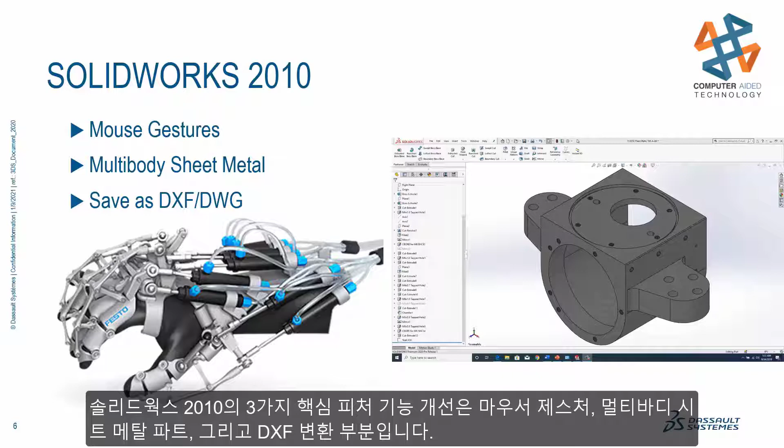Let's go all the way back to 2010. SOLIDWORKS World was in Anaheim, California that year. Kicking off the top SOLIDWORKS feature enhancements of the decade is mouse gestures, multiple bodies in sheet metal parts, and exporting to DXF files. We start off with the debut of mouse gestures. Using anywhere from 2 to 12 gestures, you can hold down your right mouse button and quickly select the feature you wish to use. Being a modal command, this can have different setups for parts, assemblies, drawings, and sketching mode.

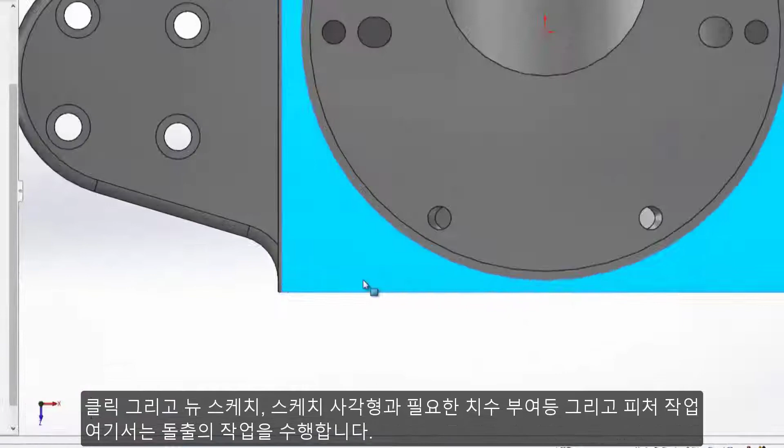Here, we're going to use mouse gestures to add a fillet, create a new sketch, sketch a rectangle, apply the necessary dimensions, and perform a feature. In this case, we'll do an extrude.

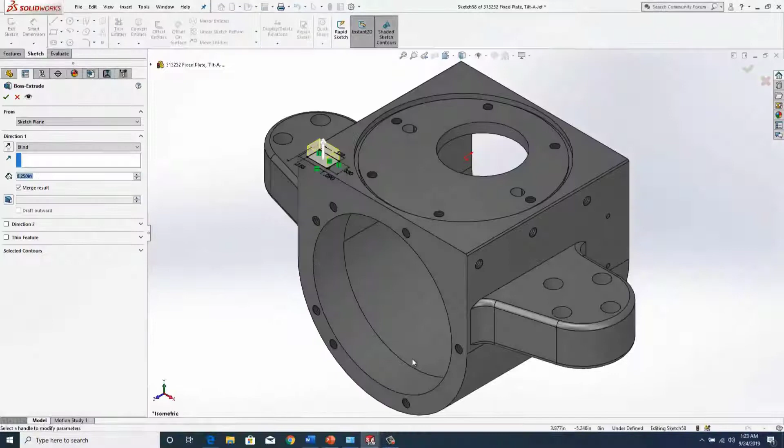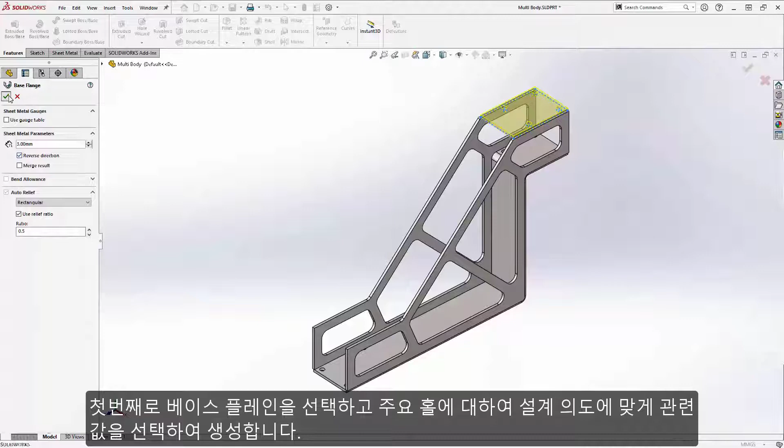Here we have a machined part that can be better manufactured out of sheet metal. SOLIDWORKS 2010 gave us the ability to do multiple solid bodies with sheet metal components, something that previously would have to be done with assemblies. Recreating this component out of sheet metal certainly requires these multiple pieces. Creating the top plate is easily done in this single part environment. First, base flanges to capture the design intent with these main holes. Now we are up to 5 individual sheet metal bodies.

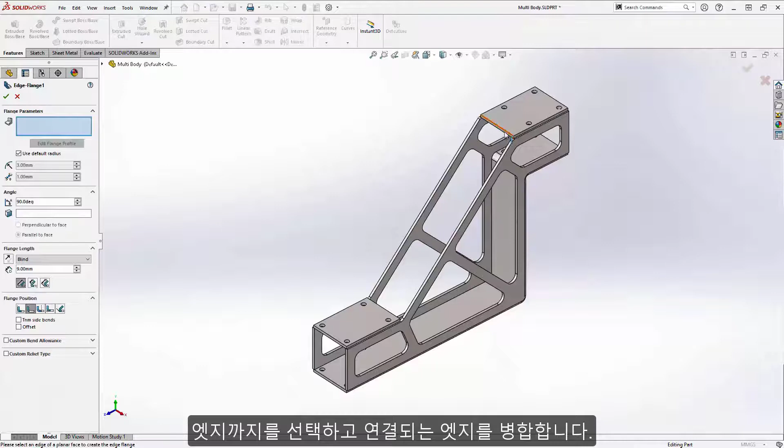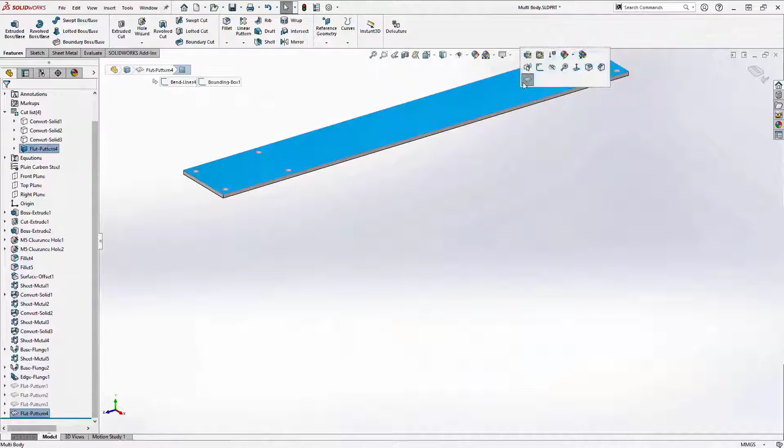Not only did SOLIDWORKS 2010 give us the ability to have multiple bodies, the edge flange command was enhanced, giving us an easy way to bridge these bodies together by selecting up to edge and merge. We can view the flat pattern of any of these multiple bodies easily. Utilizing this up to edge and merge command one more time, we can connect the two main side plates, making them a single body.

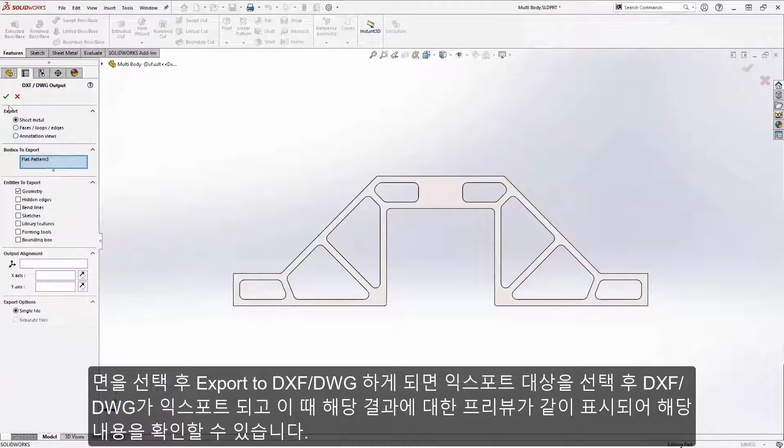After adjusting the bin location option and looking at the flat pattern, SOLIDWORKS 2010 also gives us another one of our favorites, this easy button for exporting a DXF. Just right-click on the face, export to DXF/DWG. It doesn't get any easier than that. We identify what type of geometry gets exported, and also have this awesome preview window that gives us the ability to remove any lines that we do not want translated to the DXF.

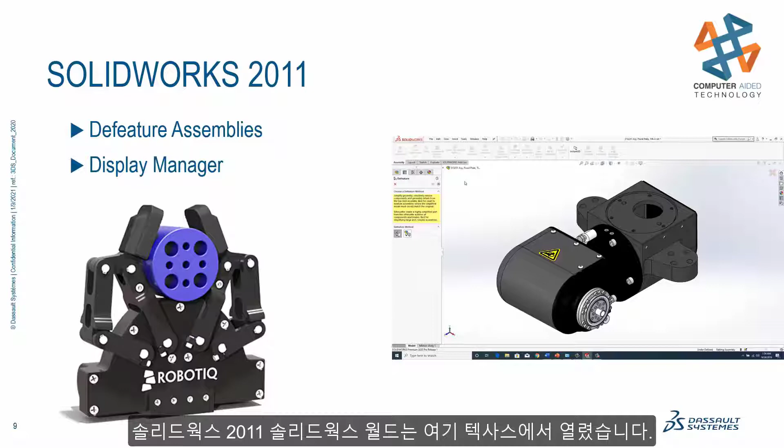Flipping the calendar forward to 2011, SOLIDWORKS World was in San Antonio, Texas that year. In SOLIDWORKS 2011, some of the gems include the Defeature tool for assemblies and the brand new Display Manager. Suppliers are always eager to have customers utilize their designs and products. However, customers typically don't need a lot of the internal detail of the design, in addition to which suppliers don't want to give away their intellectual property.

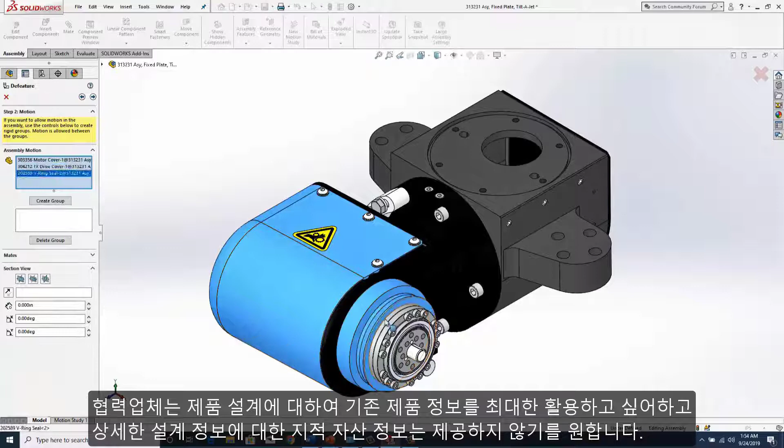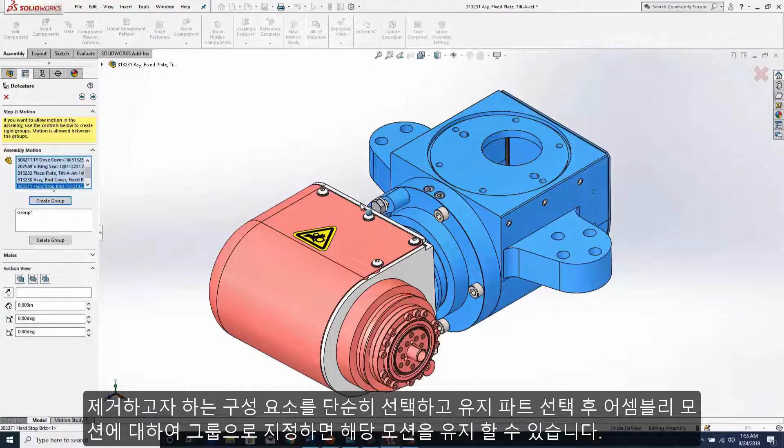We have a lot of options to pick and choose from of how to simplify the model. We can remove components based on their size, just take out all internal components, or specifically select components to remove or retain. One thing that's unique to SOLIDWORKS is the ability to preserve assembly motion. So we can come in and select several components and group them together. In this case, we're grouping the casing elements. We want the input shaft as a separate component, and then the output shaft as a separate component as well.

SOLIDWORKS will then go through and, based on our selections in this case, remove the internal components that are enclosed within the geometry, as well as ensure we preserve those features that we've selected. It only takes a few seconds and does a very efficient job of clearing out a lot of the detail that's not necessary. We still preserve a lot of the external detail because that gives visual information about what it looks like, as well as make sure it fits into your design environment.

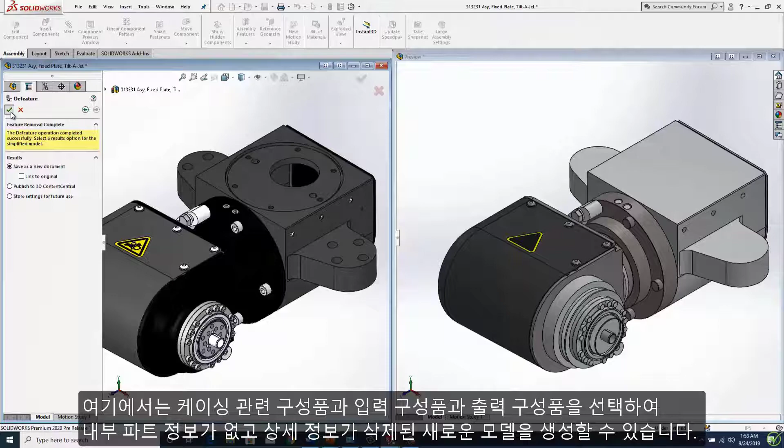SOLIDWORKS 2011 also introduced the Display Manager. Up above the FeatureManager, we now have a one-stop shop for all things visual. Here we can access scenes, adjust their settings like the lighting. We can see all the appearance properties of the components and easily change how they're organized. Listing by hierarchy, it becomes clear that some part appearances are being overridden by appearances at the assembly level. With this information, it's easy to remove that appearance definition, returning the part's original appearance. Without the Display Manager, identifying this situation is no easy task.

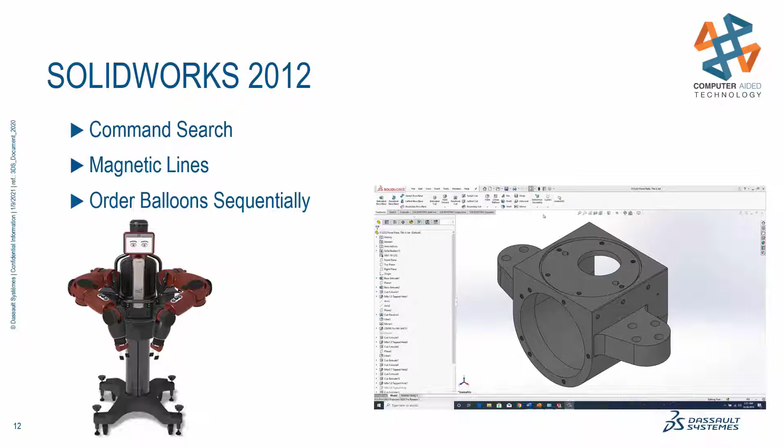Now we jump to 2012. SOLIDWORKS World moved to San Diego, California that year. The best feature enhancements of SOLIDWORKS 2012 include command search, magnetic lines, and auto balloon functionality. Command search is a powerful new tool that makes it very quick and easy to find any command that could be buried in a pull-down menu or in your CommandManager.

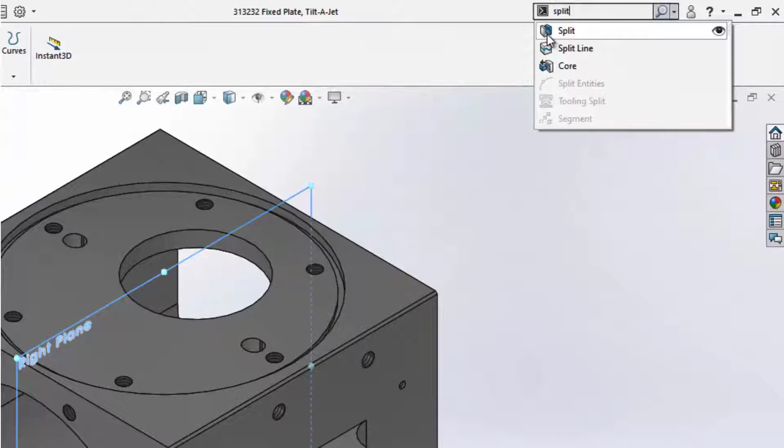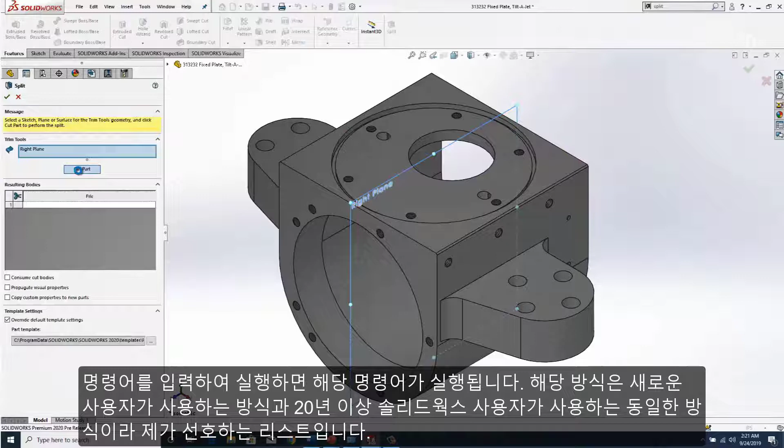Let's do a quick search for the split feature. We can easily add this CommandManager tab if it doesn't already exist. Or we can choose the spyglass in the right-hand corner, and SOLIDWORKS will go ahead and find that command on the CommandManager and even point it out to us. And we can just click that command to launch it. This is one of our favorites of the favorite list because it is for the new user or a user that has been running SOLIDWORKS for 20 plus years.

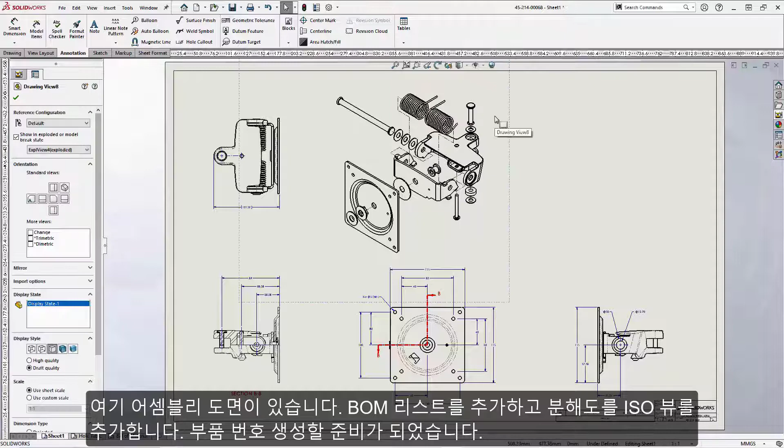Now, let's look at the power of magnetic lines. Here we have an assembly drawing, and we'll prepare it for the bill of materials by first placing our exploded isometric view. Placing the bill of materials in the upper right corner gets us ready to place the balloons. And we'll do this with the auto balloon command. The auto balloon command gives us some nicely arranged balloons.

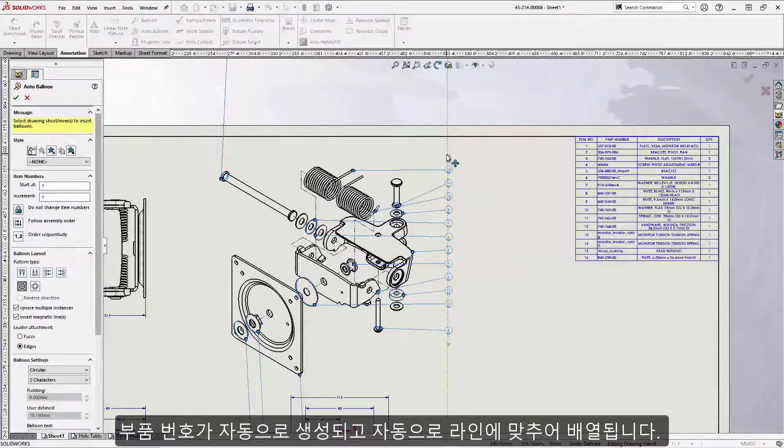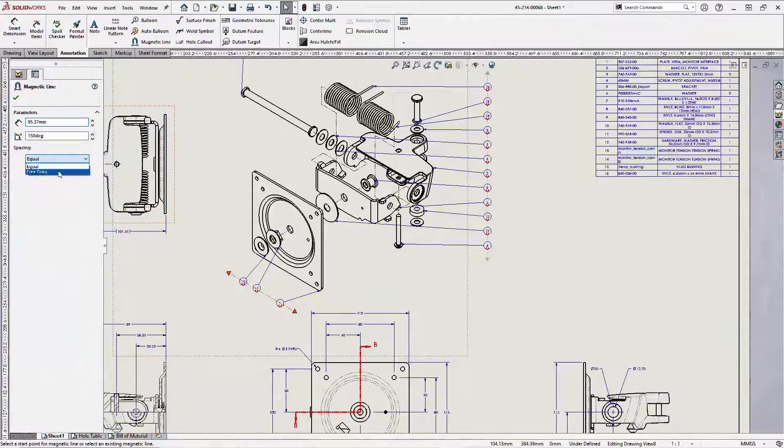This linear alignment is due to these balloons being attached to a magnetic line. This line is easy to manipulate, giving us excellent control of balloon placement. Multiple magnetic lines are inserted all at once. Individual balloons can be moved and shuffled along the lines, or even equally spaced. Now that the balloons are placed, the same auto balloon command has another awesome feature. We can resequence these balloons, ordering them sequentially, and even pick which one is the starting item number 1. As you'd expect, the bill of materials table responds and updates accordingly.

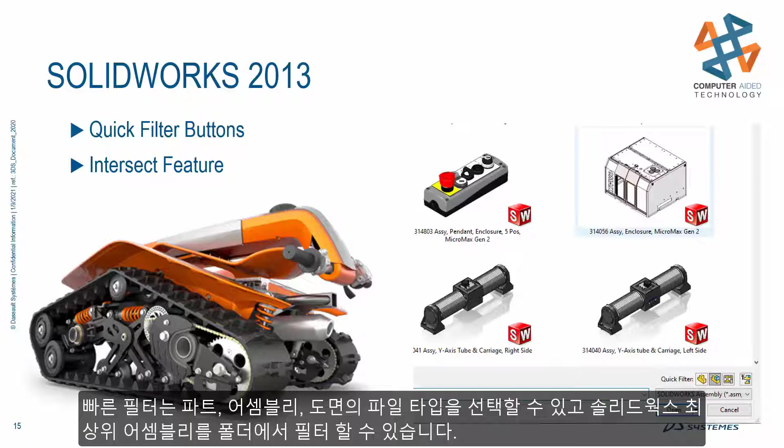As we turn the page again, we're now up to 2013, where SOLIDWORKS World was in Orlando, Florida. The best new features from 2013 are a remarkable pair. The Quick Filter button is beautifully simple, and the Intersect feature is amazingly powerful. Quick Filter buttons are found in the Open dialog and can filter SOLIDWORKS part, assembly, and drawing file types. It also will filter for the top-level assembly files that exist in that same directory, making it very easy to open the files that you're looking for.

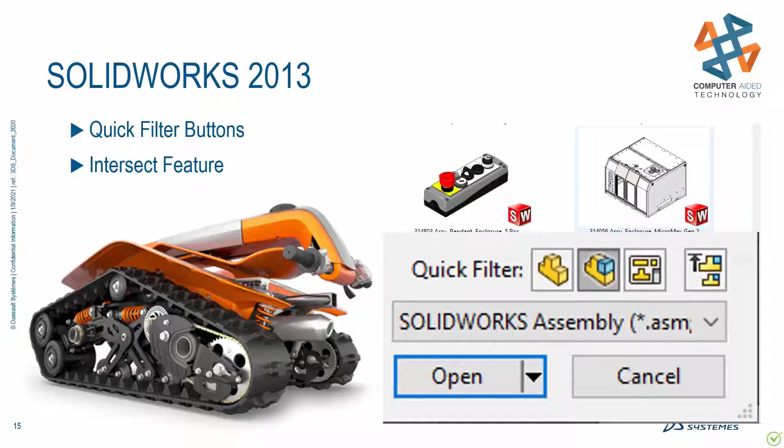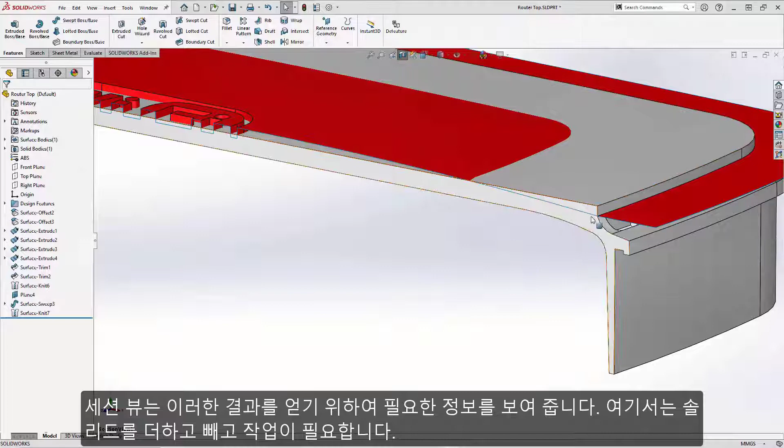SOLIDWORKS 2013 introduced the powerful Intersect command. It bridges the gap between solid and surface modeling. This wireless router design needs some work to make it more stylish. The housing is modeled with solid features, and we've already created a new top profile using surfaces that you see here. The section view shows what we're trying to achieve. It definitely requires both adding and removing material to the solid design.

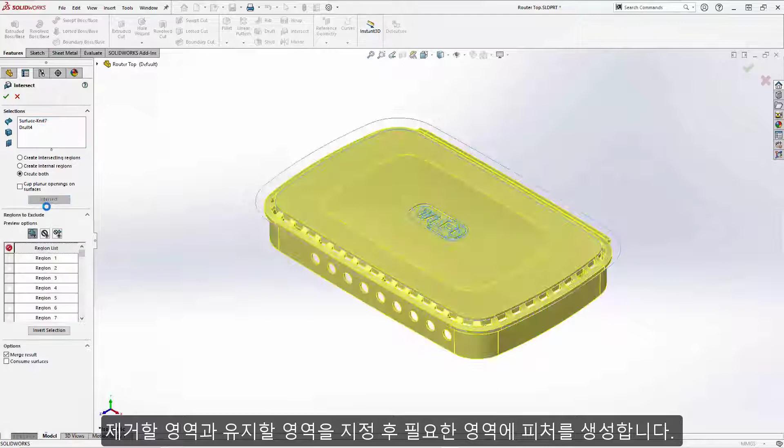As of SOLIDWORKS 2013, we have the Intersect feature. It allows us to choose both solid and surface bodies, and SOLIDWORKS will find all the possible regions where they intersect. We can identify which regions to keep or remove. This awesome feature cuts out all the tedious commands previously required, like cut with surface, knitting, trimming, merging, etc. This required far less work than prior to this very powerful tool, making it another obvious addition to our list of best SOLIDWORKS features of the decade.

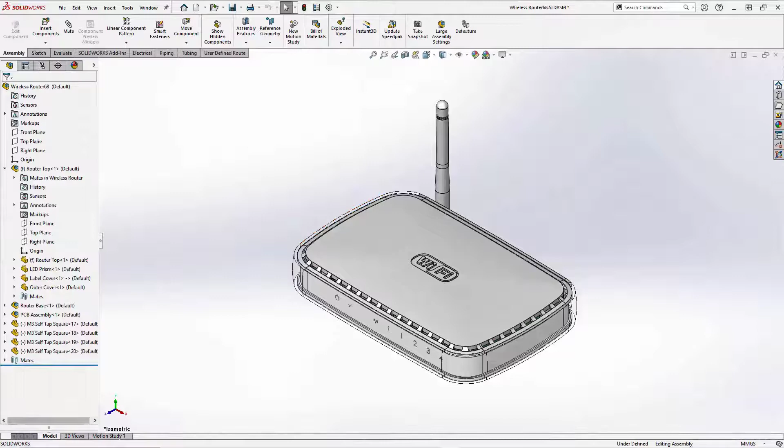Here we go to 2014. SOLIDWORKS World returned to San Diego, California. The best enhancements of 2014 include an amazingly simple way to create mates, a new method for creating and working with sketch splines, and also a way for replacing sketch entities.

In 2014, the creation of mates is even simpler and faster, with the mate icons being added to the context-sensitive toolbar. Enabling this through Tools Customize, you can activate the ability to add mates and turn on the configuration switcher as well for the context-sensitive toolbar.

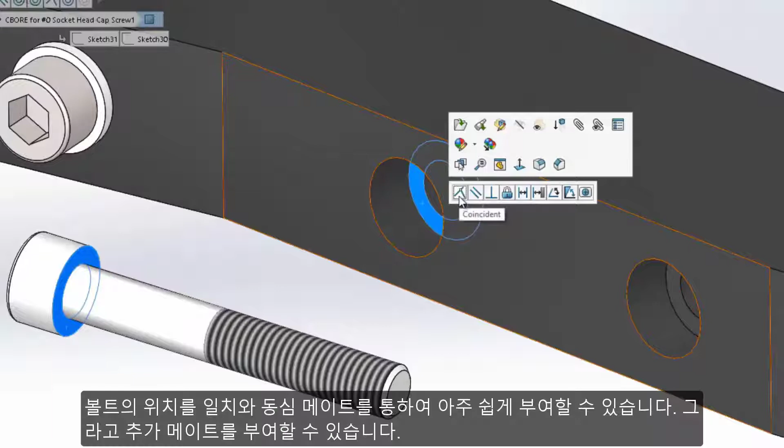Adding mates like this concentric and coincident are very quick and easy, but we've also gone as far as adding additional mates such as width mates, slot mates, and profile center mates. It's a great new way to put your assemblies together with ease.

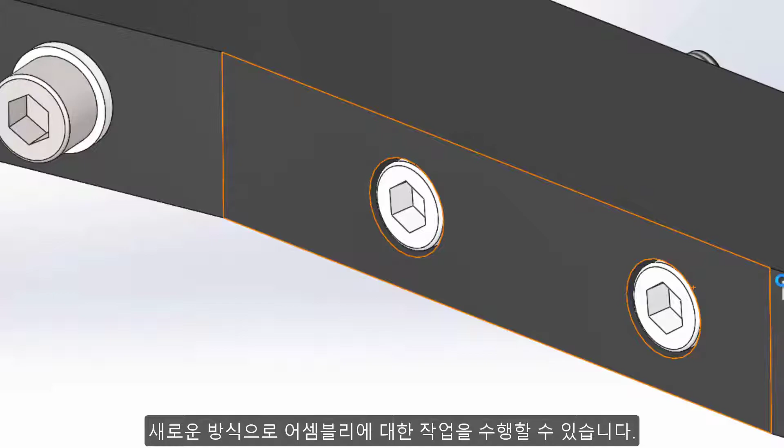Ever since SOLIDWORKS was released, splines have always been a necessary evil. Working with them is challenging and very intimidating for new users. Showing the curvature of this spline reveals some asymmetry and some extra inflection points. In SOLIDWORKS 2014, one of the best enhancements is the Style Spline command.

Rather than defining a spline by spline points, we are instead sketching a series of lines that control the spline, much like a control polygon. We can add relations to these segments, working towards fully defining the spline. That's something that was always very challenging with the old method of sketching splines.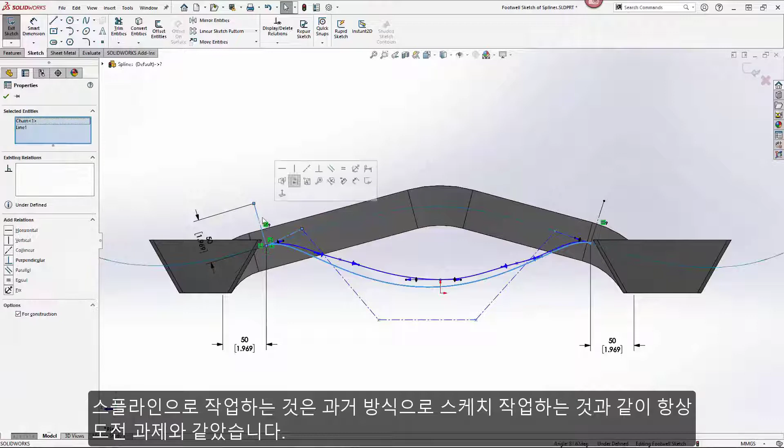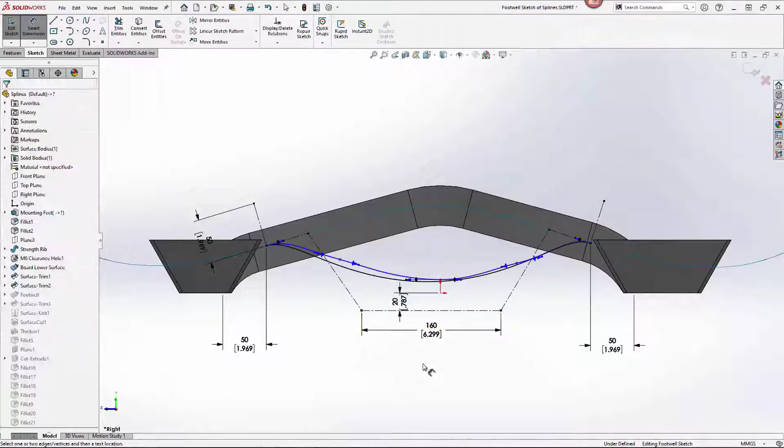We can also add dimensions. And looking at the curvature of this new spline, you can see how smooth it is and get a great view of its symmetry as well.

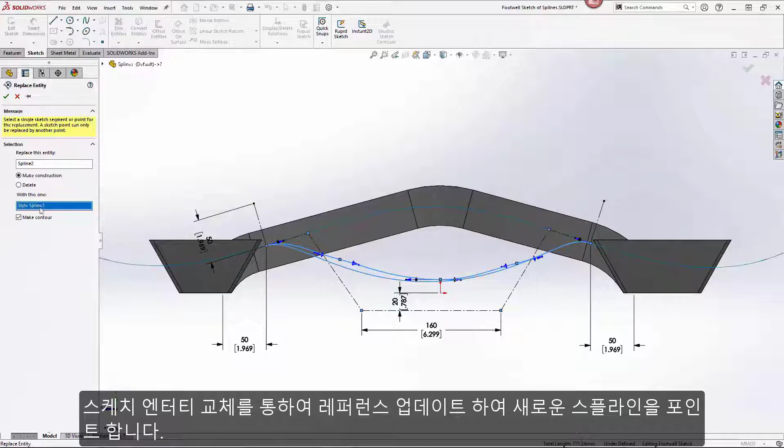Another top enhancement is Replace Sketch Entity. Downstream features depend on the initial spline, but using this Replace Sketch Entities command allows us to update those references to point to our newly created style spline. This gives us the ability to do some drastic edits with much less cleanup than previously required. You can see how both these commands easily made their way into the best SOLIDWORKS feature enhancements of the decade.

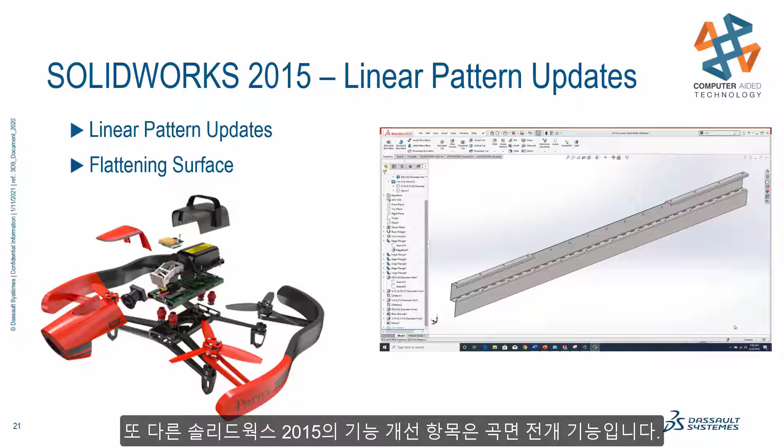As we jump to 2015, SOLIDWORKS World jumped to Phoenix, Arizona. The best feature enhancements of this release include great strides in increasing the functionality of patterns. The new variable pattern feature allowed us to create geometries that would have taken us many more features. But our favorite from this version was actually the update to linear patterns. Flattening sheet metal parts has always been extremely helpful, but in SOLIDWORKS 2015, a great enhancement extended flattening to our surface bodies and faces.

Here you can see the linear pattern in this part. The linear pattern feature was updated with the ability to go up to a reference geometry. This new option removes the need to use equations to control instance count or equations to solve the spacing. You can also set a margin away from reference geometry. This is great for ensuring features would not be created too close to the edge of your part. This update to the linear pattern made infusing design intent into the model much easier and more efficient.

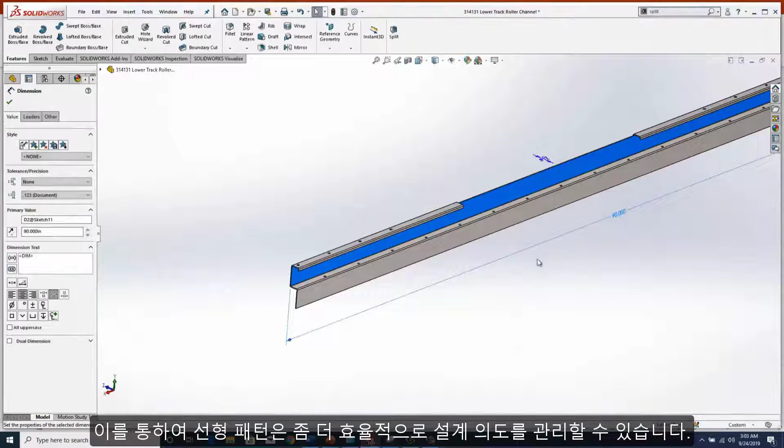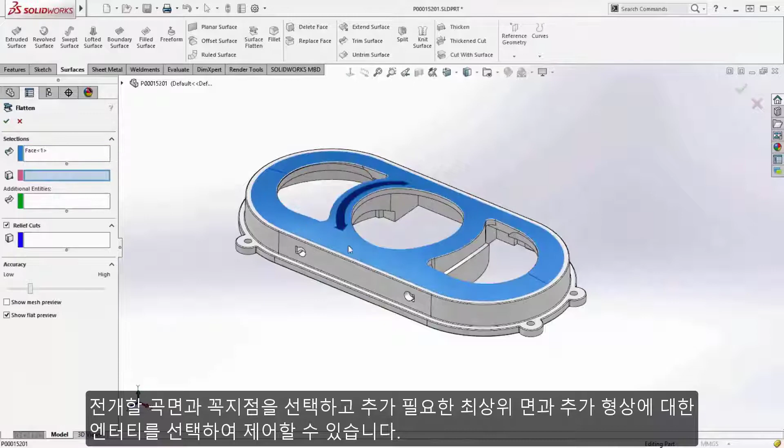The Flatten Surface command is a great tool that was added here in SOLIDWORKS 2015. This opens the door for many things such as fabric patterns or vinyl decals. Our control knob design here needs a decal. The powerful Flatten Surface command is up for the challenge. Selecting the top face and a vertex to be fixed gets us started. We can select additional geometry to control our shape. Here we'll remove some edges to cut out the region for these arrows.

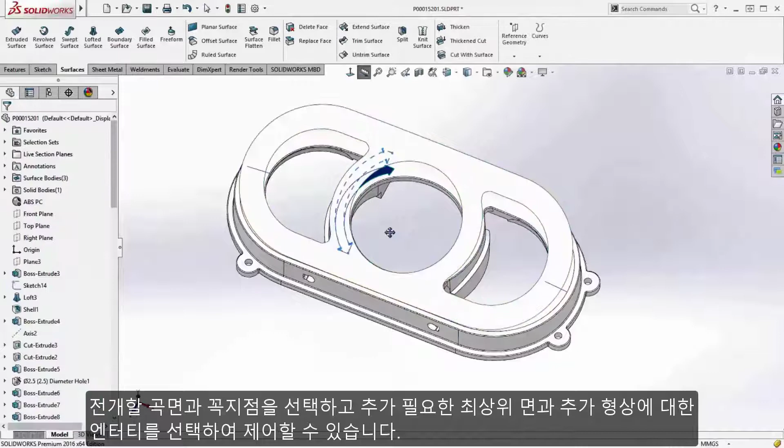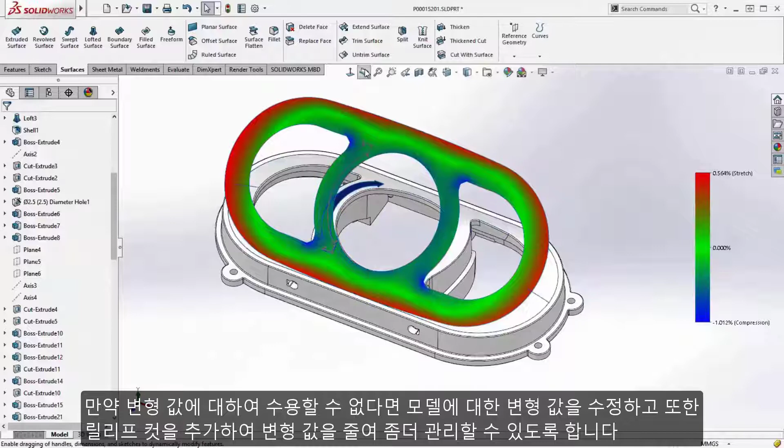The flattened surface required some stretching and compression to solve. We can easily see the deformation plot to understand where that occurred. If a model edit forces this deformation to unacceptable values, we can actually edit this awesome Flatten Surface command and add some relief cuts. After adding these cuts, you can see the deformation is much more manageable. This makes it easy to understand why the Flatten Surface command makes our list for best features of this decade.

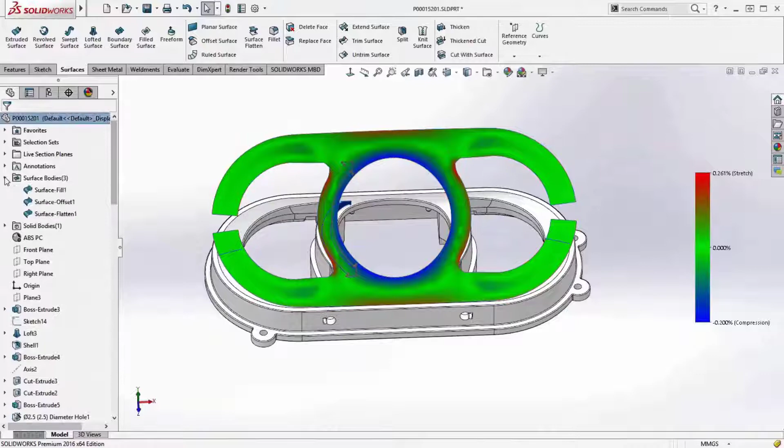Now we hit 2016. SOLIDWORKS World migrated to Dallas, Texas this year. With SOLIDWORKS 2016, our top feature enhancements include interface shortcuts, easy ways to repair busted mates, and an awesome way to adjust mate parameters to control assembly positions. First, we made it easier to dig into assemblies with breadcrumbs.

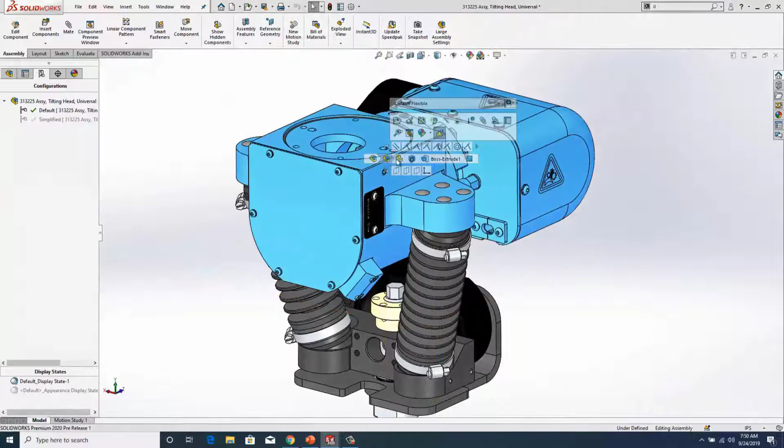By simply selecting a component and hitting the D key to bring the breadcrumbs to your cursor, you can search through assembly structures, parts, reference geometry, features, and sketches. Even mates associated with a component, feature, or faces that you've selected. And all these things are modifiable right from these breadcrumbs.

Much less mouse travel is required to accomplish your daily needs.

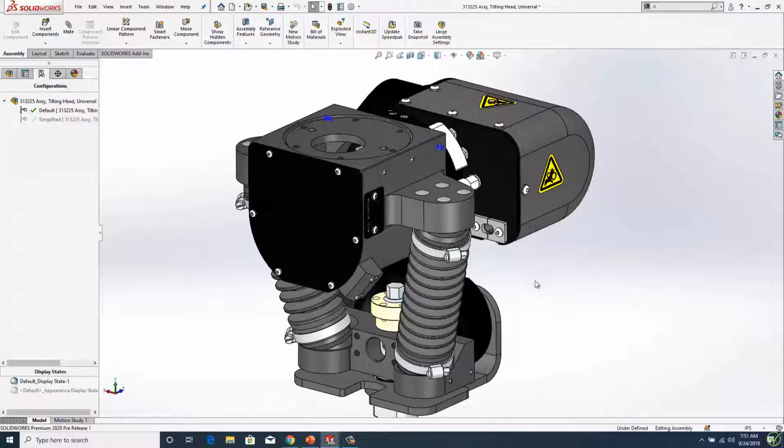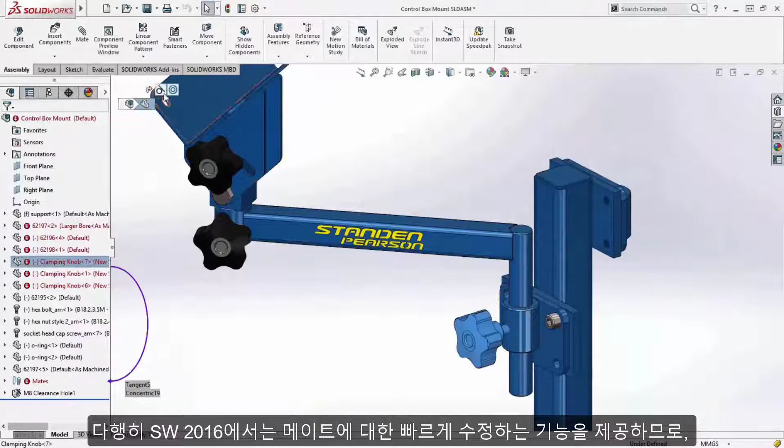Editing a broken mate, we can see the missing references from the knob. Following the traditional workflow of selecting the updated face now gave us the ability to replace all 3 of those broken mate references in a single step. The amount of effort this can save us on much larger assemblies makes it easy to understand how this enhancement made our list of best SOLIDWORKS feature enhancements of the decade.

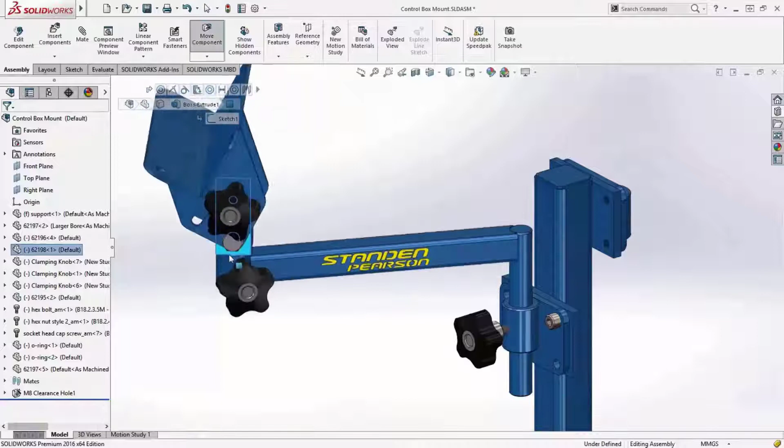With all of the degrees of freedom and motion a model like this robot has, it can be a handful to manipulate it to the desired positions. Just like controlling an actual robot, the mate controller makes it easy. This is a very convenient enhancement and one of the tops that was added to SOLIDWORKS 2016.

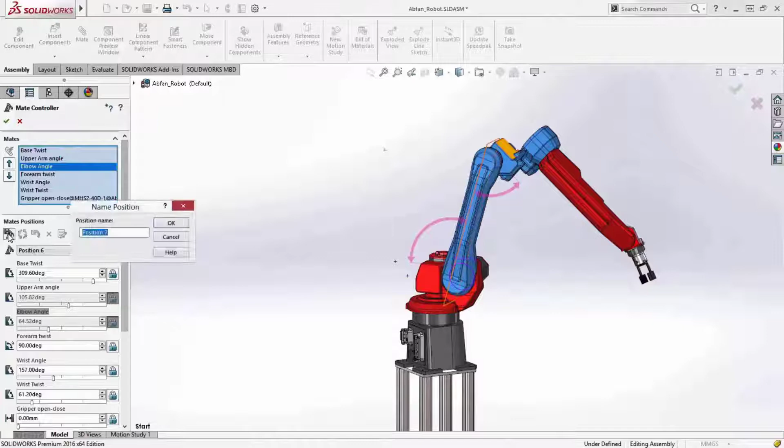All of our numerically driven mates can be added to this mate controller interface. In this case, I've already given the mates some descriptive names. Positions defined by the mate values are easily created and saved. You can use numerical values to define them, or unlock the values and just position the assembly by dragging components to adjust.

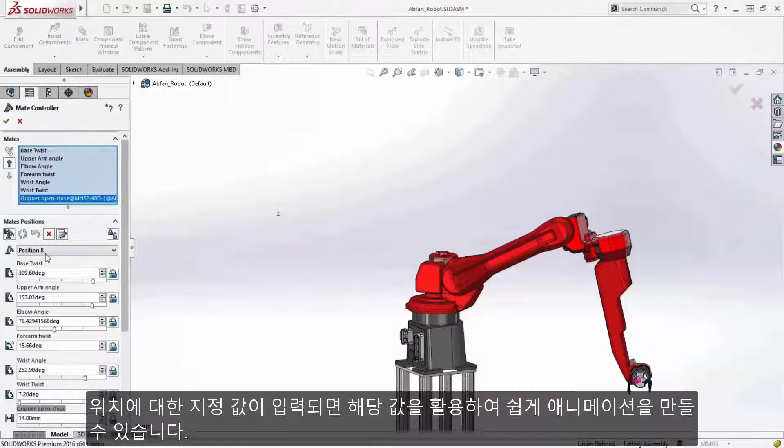Once all these positions are defined, using this for animations is incredibly easy. Using the positions as if they are keyframes, we can define the amount of time it takes to move between each one.

Expanding on this powerful new enhancement for 2016, we can take that mate controller animation and create a very realistic and powerful animation. It's easy to see why 2016 had some great additions that made our list of the best SOLIDWORKS feature enhancements of the decade.

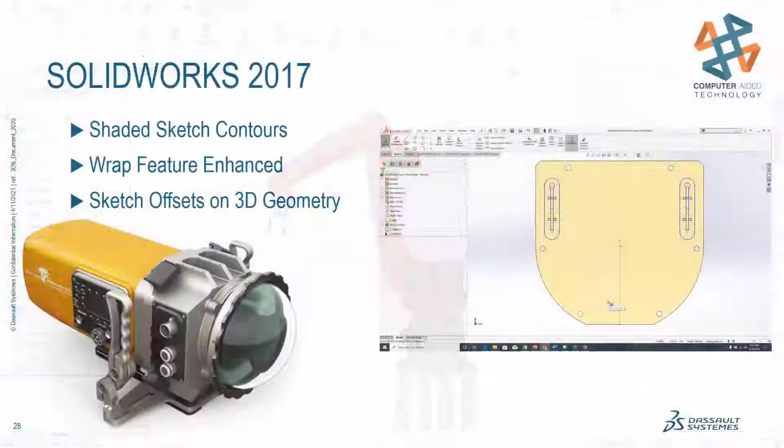Now we've made it up to 2017. If you attended the event, you'd remember that SOLIDWORKS World was in Los Angeles, California that year. The top SOLIDWORKS feature enhancements of the decade from 2017 are shaded sketch contours, the wrap feature became much more powerful, and sketch offsets can be done on 3D geometry. Let's first look at the sketch contours.

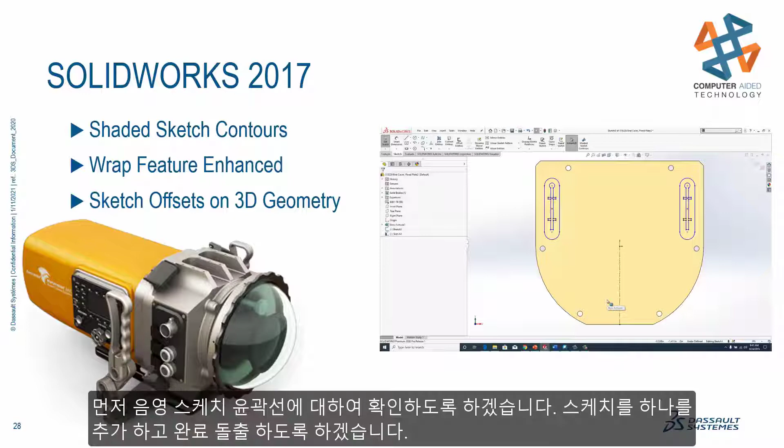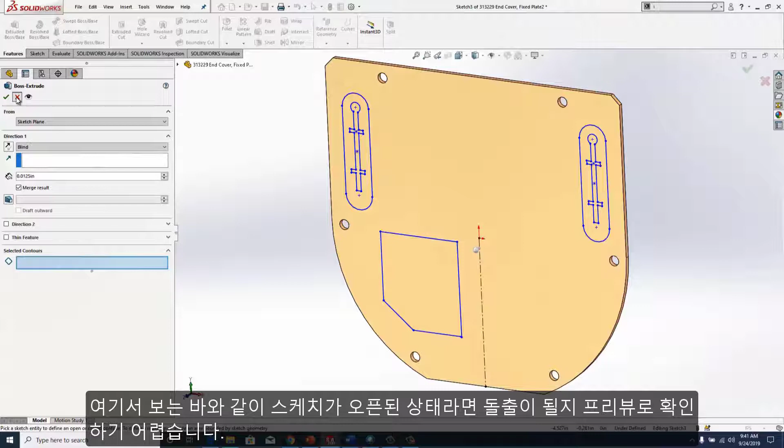Here I go, trying to finish my sketch so I can extrude it. Turning on the shaded sketch contour option has lots of benefits. First, it will show you any sketch geometries that are not a closed contour. As you can see here, there's an opening at the end of the contour, and the extrude command does not show a preview. Shaded sketch contour makes that clear.

Once the contour is closed, you can select the whole group and move them together by clicking the shaded contour. You can also copy the whole thing by holding down Control and dragging the contour in the shaded area. While holding the Alt key, you can pre-select contours to use in a feature.

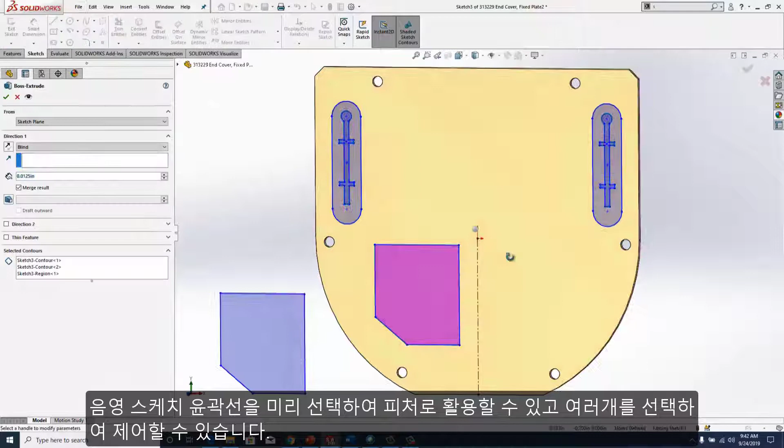If you'd like to select multiple contours, hold Control and Alt at the same time and you can select multiple contours. Once you release the selection, you can execute the extrude command or any command directly from the cursor tip, or go directly to the feature tab in the command manager.

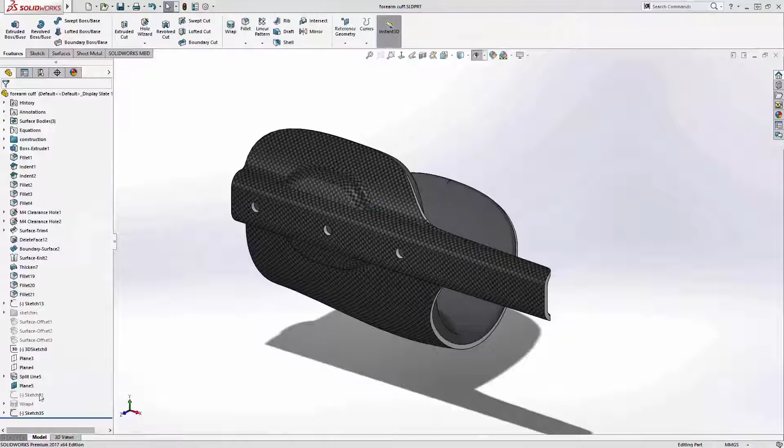Now, let's look at the wrap and 3D sketch offsets by examining a component from the mobility assistance device. We'll open this cuff. Previously, the wrap command worked on analytical geometry, like cylinders and planar faces. Now it works on almost everything, including spline-based surfaces. Here we have a sketch containing the product model that we want to emboss on the model. The wrap feature's 2017 enhancements let us select both of these faces, which are non-analytical geometry.

Moving the sketch around, you can see how powerful this wrap feature became, making it an obvious choice for one of the best SOLIDWORKS feature enhancements of the decade.

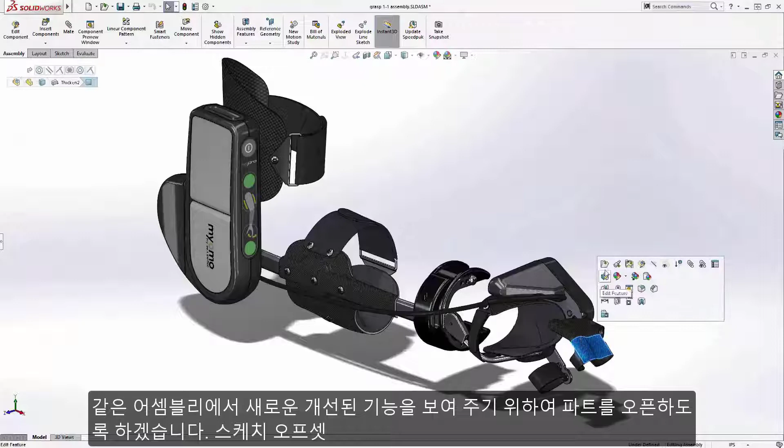From the same assembly, let's open this finger cuff to examine another great enhancement, sketch offsets. We're going to create a cutout to reduce a bit of weight. So rolling back to where we had the surface geometry, the Offset on Surface command is an amazing tool. Offsetting edges works on multiple faces, easily flipping which face this edge is offset on.

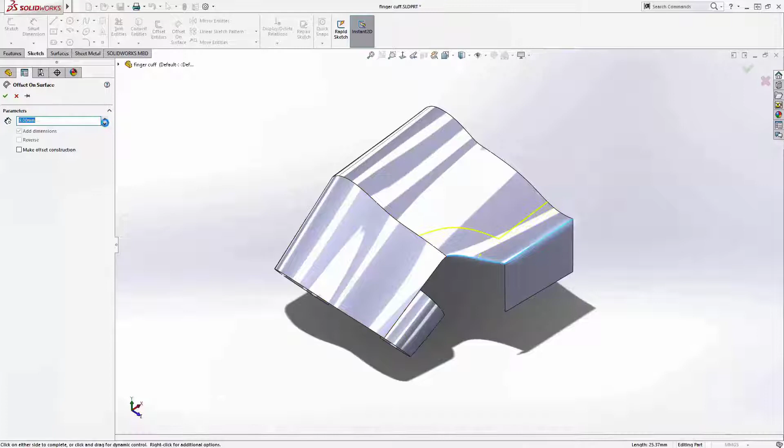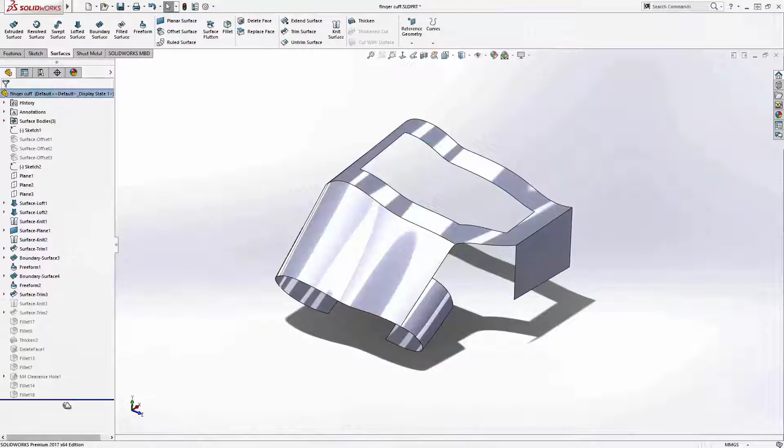Starting the Offset on Surface command over, but this time selecting a complex face. Using the new boundary as a trimming tool, it accomplishes our goal of weight and material reduction. 2017 really did give us some great SOLIDWORKS feature enhancements.

We moved to 2018, but SOLIDWORKS World returned to Los Angeles, California again. SOLIDWORKS 2018 gave us many options to choose from for our list of best SOLIDWORKS feature enhancements of the decade. We really liked the new selection tool options and loved the smart explode lines. First, let's look at the selection option.

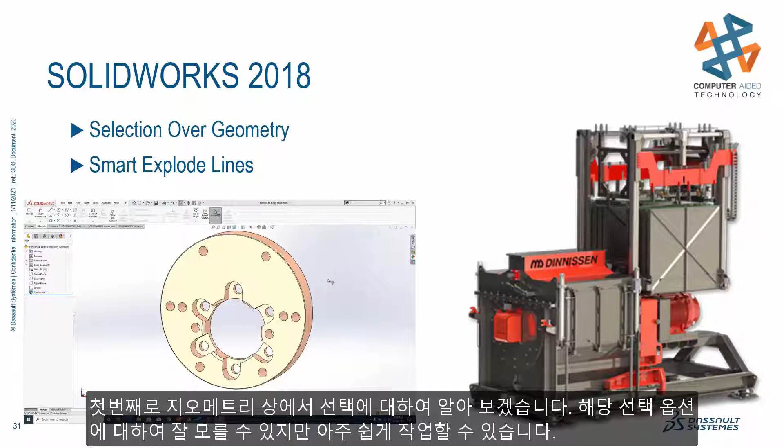This is one feature that a lot of us don't know but should make our selections a little bit easier to perform. When we try to select things on the model, you typically end up selecting the face that your cursor is over, when you really just want to execute a selection. So previously, to remedy that, you'd have to start your selection in empty space, making sure you weren't on top of the model.

In SOLIDWORKS 2018, you can now hit the T key on your keyboard and you can place your cursor on the model and it will not select the face that your cursor is over. This allows you to make the selection that you need.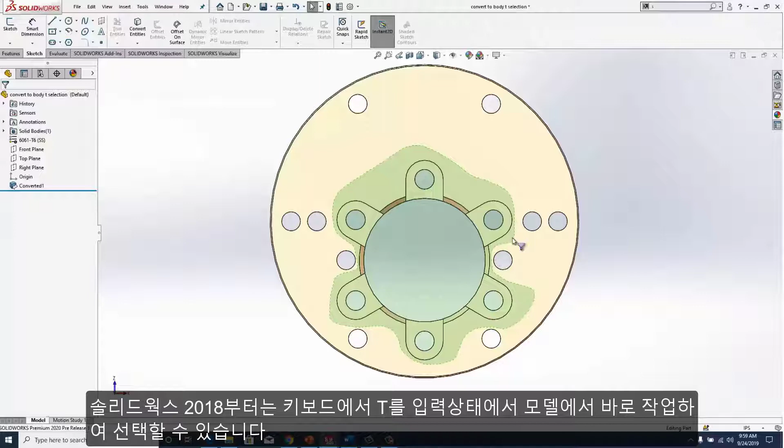In this scenario, we'd like to take out this opening along with the bolt recess with our delete face command. The selections might take some time, but if we use a combination of the lasso select and the new ability to use our T key, we can quickly make this selection we need.

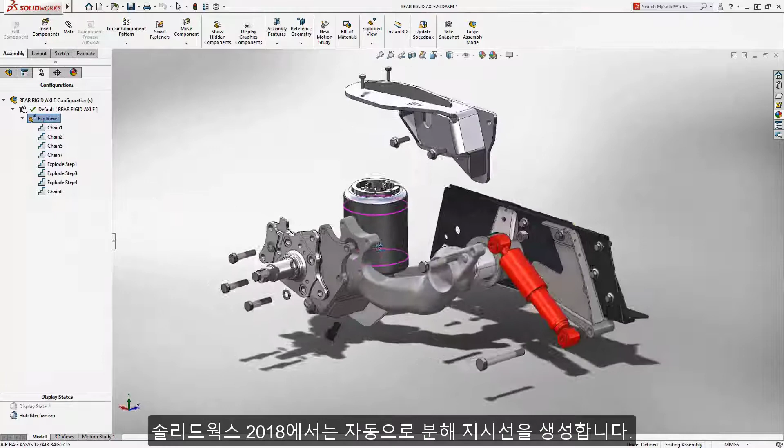Creating exploded views is one of the best ways to communicate your designs in SOLIDWORKS. SOLIDWORKS 2018 gave us the Smart Explode Line tool to automatically create our explode lines. SOLIDWORKS gathers all the components in our exploded view and previews each explode line.

We have options for where the explode lines attach to the parts. Bounding box, origin, or even drag to any other point on the parts. SOLIDWORKS also lets us apply this line location to every other identical instance, saving us a significant amount of time.

As you would expect, changing the exploded view will update these explode lines, keeping everything current. If you're familiar with the old method of creating the explode line sketch, then you definitely understand why this enhancement made our list.

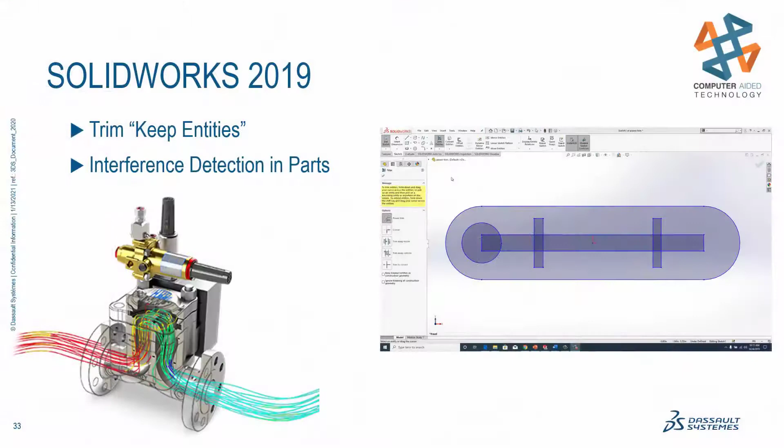Here we are, 2019 already. SOLIDWORKS World was in Dallas, Texas back then. Some of the best feature enhancements from 2019 include a subtle new option for trimming sketches and additional functionality for doing an interference detection. As you can see here, we have some nested contours overlapping in our sketch.

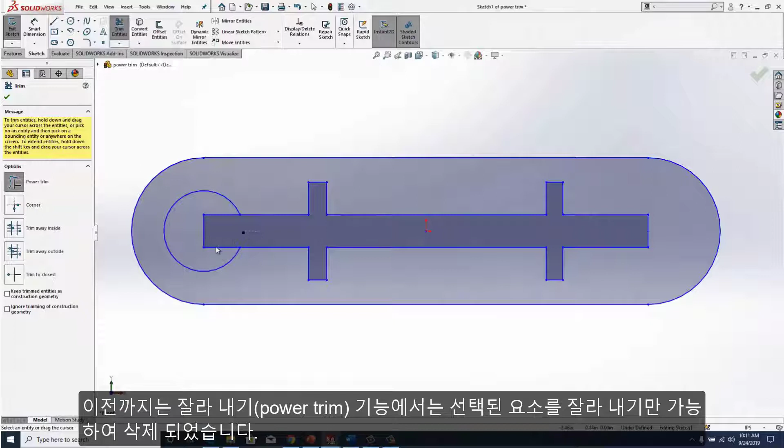We'd like to make that middle shape all one contour and not overlapping, so we're using the power trim command. The trim will delete the overlapping geometry using all the existing entities as trimming boundaries. Now let's redo that last step. New in SOLIDWORKS 2019, a checkbox was added to convert trim entities into construction geometries instead of removing them.

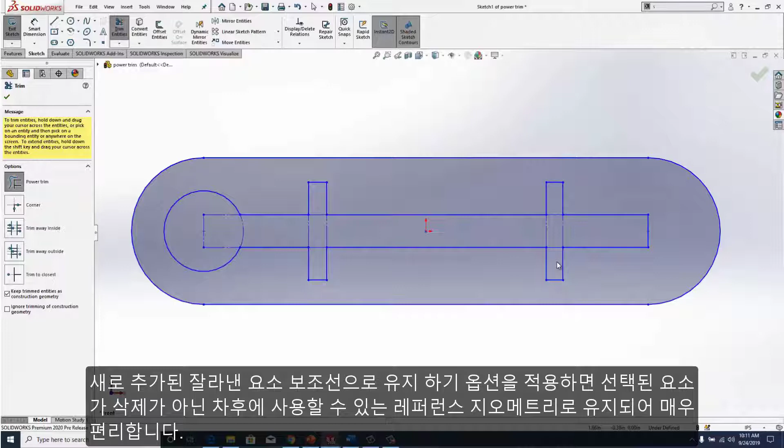What it's doing is splitting the entities at those intersection points and then taking what would be deleted and converting them into construction geometries. This is very convenient because we can now easily use them as reference geometries later on in our part design. A pretty great enhancement that could easily go unnoticed.

Designs like this weldment are often modeled in a multi-body method instead of an assembly. To find out if we have interferences, we actually had to temporarily insert this multi-body part into an assembly. SOLIDWORKS 2019 changed this and the interference detection tool became available in part mode.

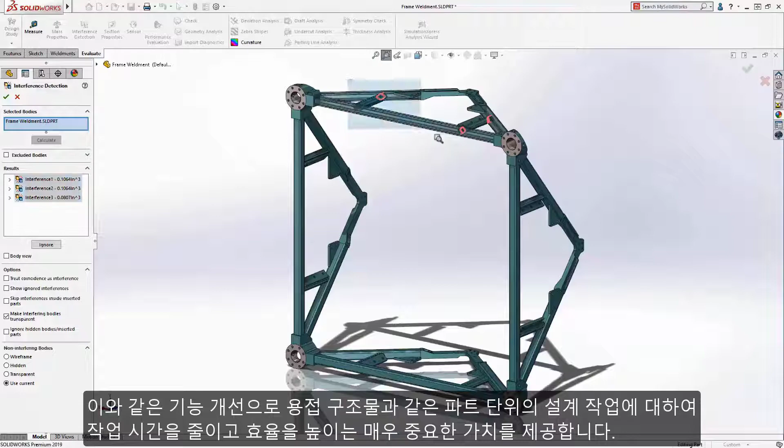This great enhancement provides important evaluation tools that can be utilized in the same file that you are working in. This functionality is very useful to verify that all members have been properly trimmed in a weldment design. Multi-body interference detection can save us lots of time and another easy choice for best SOLIDWORKS feature enhancements of the decade.

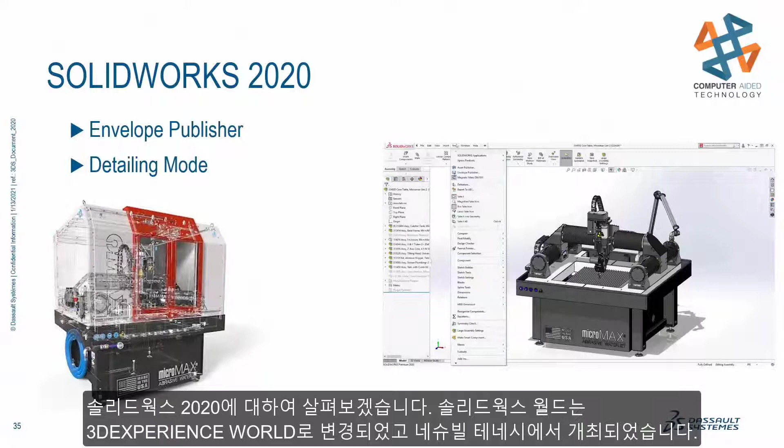We're including SOLIDWORKS 2020 as well, and you probably recall that SOLIDWORKS World became 3D Experience World and was in Nashville, Tennessee. Some great enhancements from 2020 are envelopes and a drawing detailing mode. SOLIDWORKS 2020 gave us this new envelope publisher tool. This can be very helpful when you have multiple systems and several designers.

With SOLIDWORKS 2020, envelopes are no longer limited to components in the same assembly. Just select the components needed for reference and their destination assembly. Once done defining the envelope, we can open the same exact destination assembly to complete the task. Now all the plumbing design work can be done in one place. You can even mate components directly to the envelope components.

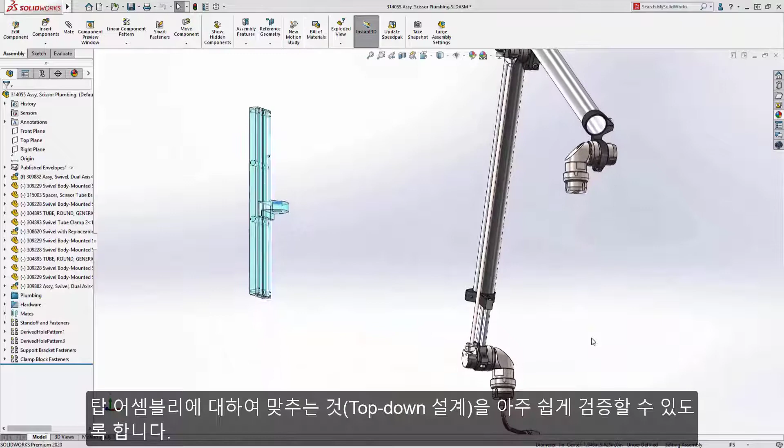It makes it easy to verify that it will fit in the top-level assembly. Envelope Publisher makes it simple to work collaboratively in large assemblies and was one more easy choice for our list of best SOLIDWORKS feature enhancements of the decade.

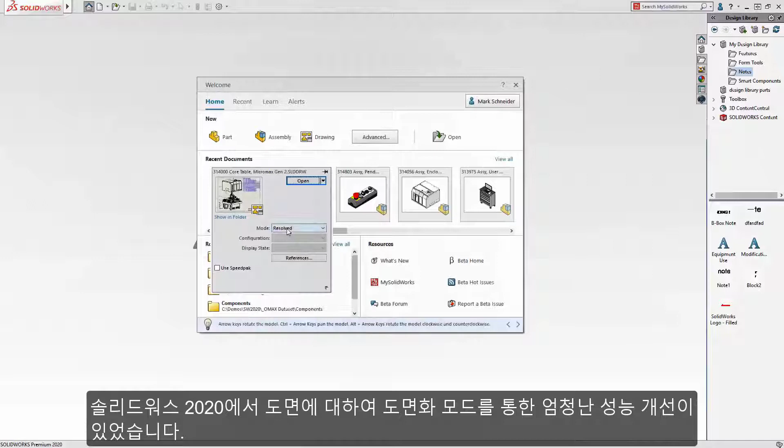Over the years, SOLIDWORKS has added some great tools for making things faster with assemblies. Everything from large assembly mode, reworking the code to increase performance, and even large design review mode. SOLIDWORKS 2020 gave us a huge performance increase for drawings called detailing mode. This mode lets us open huge, complex drawings in seconds.

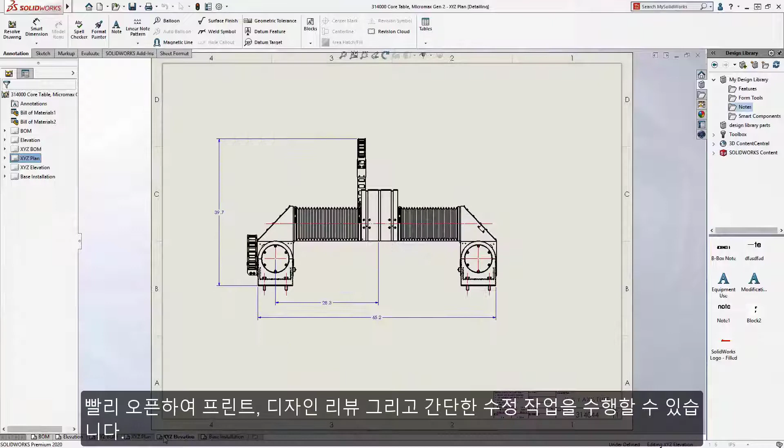The drawing is open and the views are intact, but the model does not get loaded. It is perfect for quickly opening drawings for printing, design reviews, and minor edits. It's not just for viewing. Plenty of functionality still exists in detailing mode.

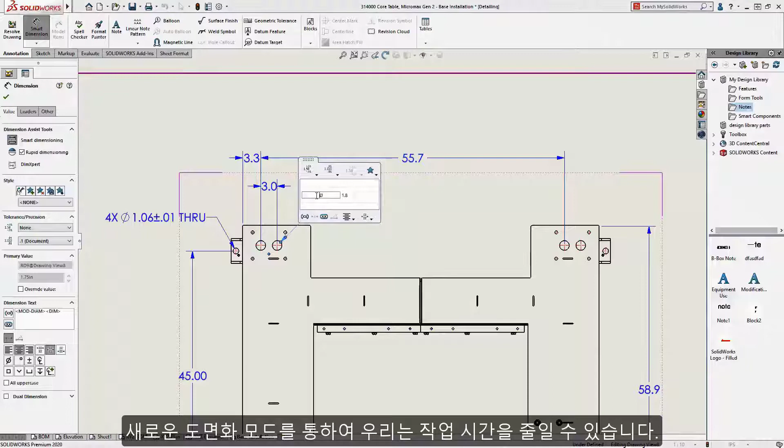We can add and edit notes, move views, edit our balloons and item numbers. We can even add new dimensions in detailing mode, like these for defining the hole locations. We love enhancements that can save lots of time, and detailing mode for drawings does exactly that.

Thank you for joining me today. I really enjoyed showing you our version of the best SOLIDWORKS feature enhancements of this decade.